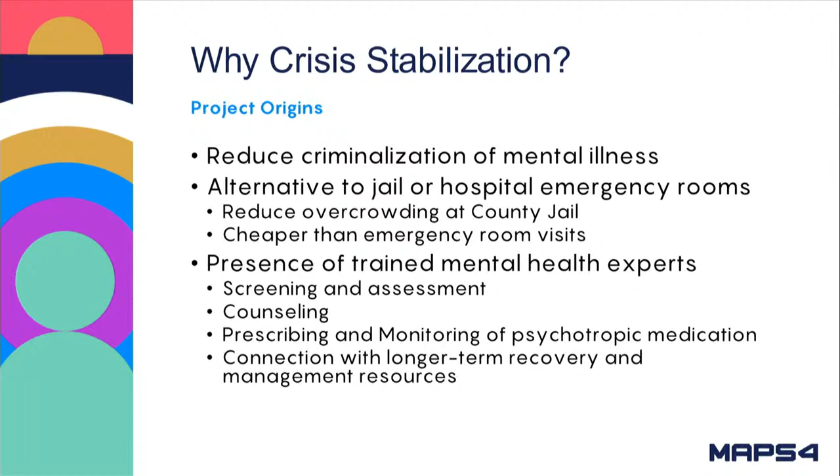So it's very easy to slip into talking about the two wings at OKIC. As a reminder, OKIC, at the General Pershing campus for North Care, is viewed as the model we were supposed to be following. It actually has two wings, so it's often easy to fall into: are we talking about the chair wing or the bed wing? I wanted to briefly introduce those two concepts.

Everyone enters the OKIC through the Urgent Recovery Center, the URC, which is the chairs. The folks that run that will be careful to say it's not 24 hours, it's 23 hours and 59 minutes that you're supposed to be there for, while you're being assessed. Generally, you're having medication introduced into your system. The staff at that point is really trying to triage and understand what that person is dealing with, because it's very difficult in those first 24 hours to understand all they may be coming with.

Then they will transfer to the crisis stabilization unit, which is a bed setting. At OKIC, there are separate rooms with beds, whereas the chairs are in a common room. That's anywhere from 3 to 5, sometimes up to 7 days typically, that you'll be in that crisis stabilization unit. I didn't mention to the subcommittee, but one of the other MAPS projects we'll eventually start talking to you about is the housing piece, which is really supposed to be the next step after this, where you can transition, hopefully, into some short-term housing.

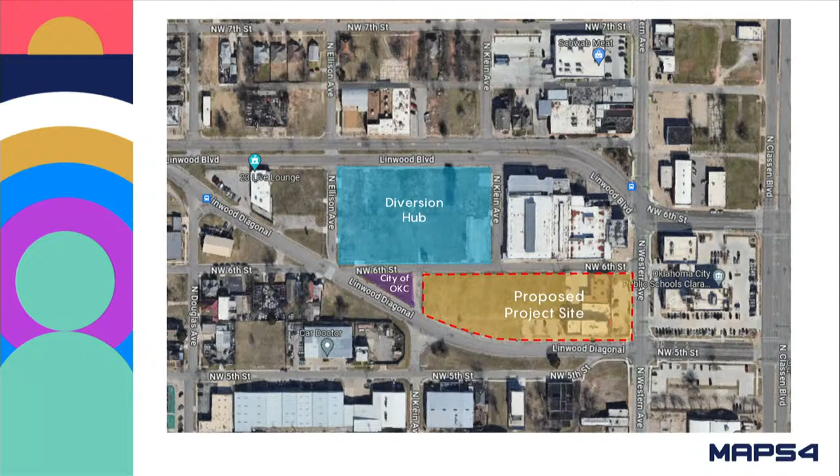You may be familiar with the Diversion Hub site, which is in blue. They have brought to us the potential to use the yellow site there, proposed project site, and then also there's a small purple triangle that the City of Oklahoma City owns, that could also potentially be brought into this site, which AHMM will talk to you about.

So in looking at your site selection, I would encourage you to look at this from 3 different perspectives: 1 is resident need, 2 is accessibility for first responders, and 3 is links to our existing healthcare system. I'm going to walk you through those as quick as I can here.

Often when you look at our city, you kind of think about our entire boundaries, but I wanted you to look at this because this is really housing density - this is how we actually use our community in terms of where our population is concentrated, and our proposed site would be right here.

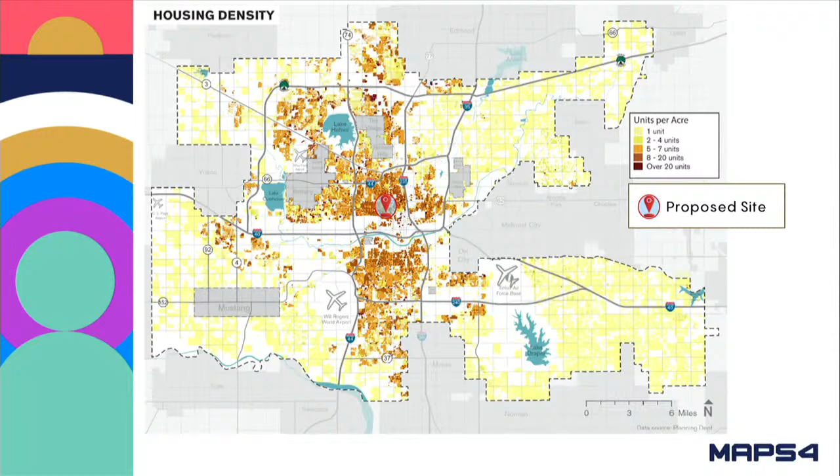Also, we were able to get with the Oklahoma City County Health Department, and they shared 3 key data points that add up into an index map, where you add all 3 together. I'm going to walk you through each of those 3 data points.

This is suicide rates by zip code. Suicide is a lower occurring phenomenon, so you're not going to have data in all the zip codes, but our site is right here.

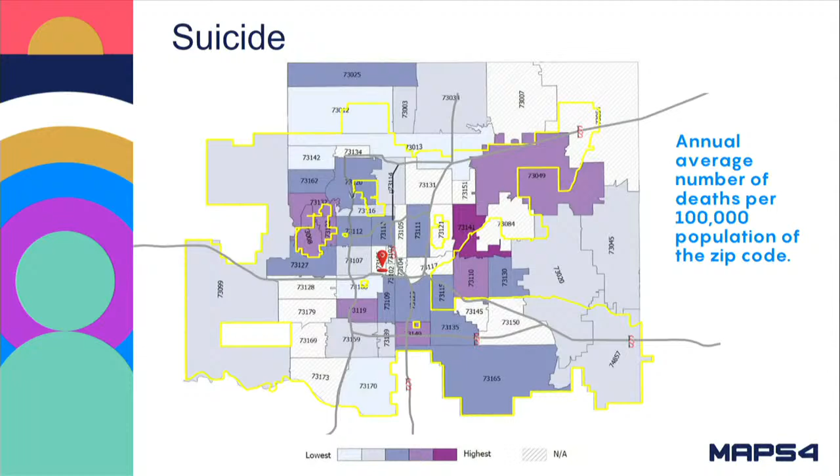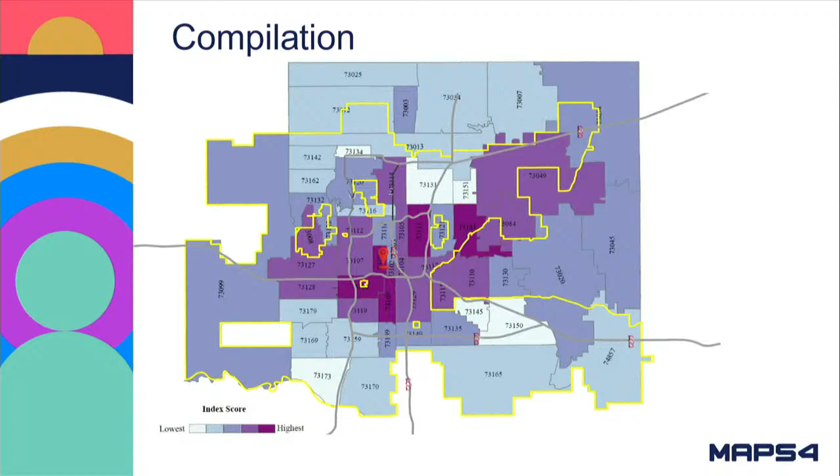Second point I want to talk about was first responders. We want to make this as convenient as possible to our first responders - they are very time crunched. That is very clear when you talk to them, and so we want something that's as convenient to all officers of our community.

I had a chance in November to do a ride-along with someone in Hefner 1 up in the northwest corner. The key takeaway from that and talking to that officer is there's only a certain number, maybe 12 officers, out on any particular beat in Hefner 1 across 3 different shifts. If they have somebody having a mental crisis, they're leaving Hefner 1 to take them somewhere, and that means there's one less officer up there.

They feel a very strong commitment to get back to their fellow officers in case they're needed, so we want to make that a very quick trip for them. The main takeaway is that we need to keep these things centralized, because you can play a game where I start to move that dot any direction and it becomes harder for those in the other corners to get to.

Last point is the healthcare system. You want to make sure there's a little bit of a back and forth. I was just debating this with Randy - it's actually more that they're coming to OKIC, and often OKIC is needing to refer them to a hospital, but in some cases, after they've been treated, they are coming back. So we want to keep them close to major health centers.

Good morning. Thank you very much for having me today to talk about this site study that we've done for the site that AJ's just introduced to you there. This is the site that we're talking about today, and we've done a few fit tests that I will talk to you in more detail about. Across here to the left of the page are all the different headings and analysis that we've completed, so what you're seeing today is a very small extract from a much larger document that looks at all these different points and topics.

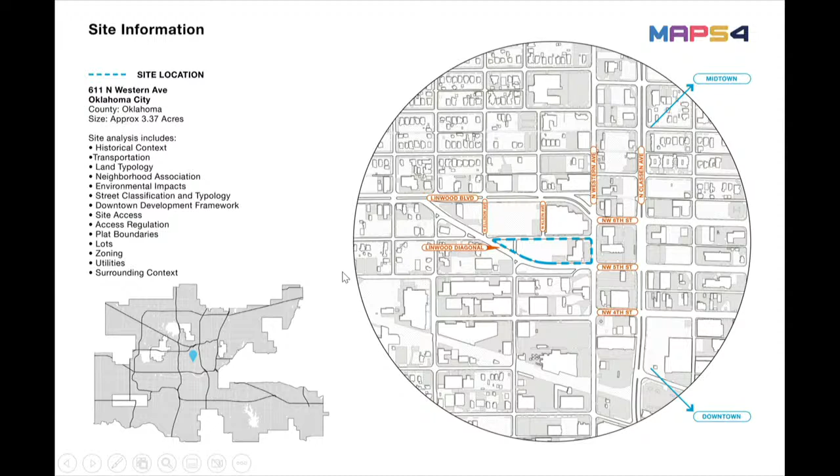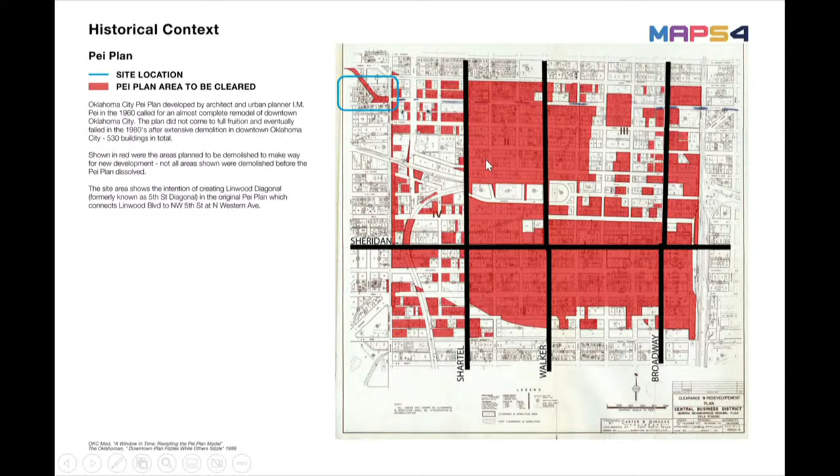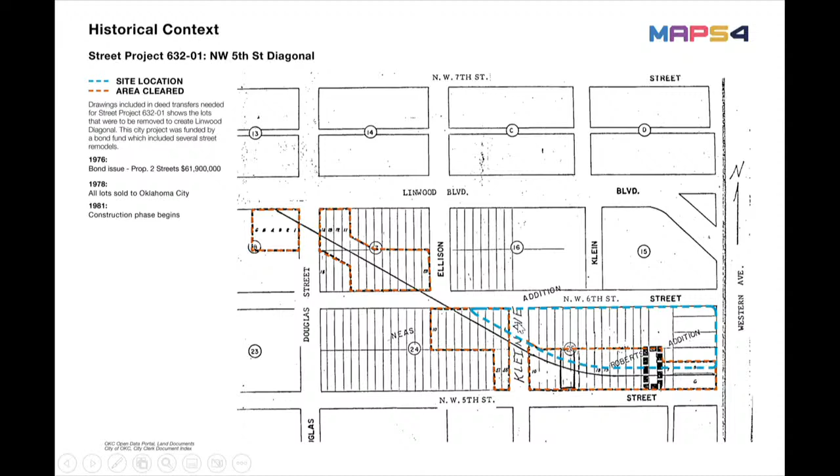The first thing we wanted to look at was the history of the site, and to try and understand why it was this slightly odd shape, this wedge shape. As you can see, it wasn't always like that - it was a typical sort of grid system, which the rest of the city follows. But over in the 1960s, with the IM Pei plan to demolish most of downtown for redevelopment, up in the top corner here shows the location of the site, and there was a key idea about connecting in 5th Street, and they created Linwood Diagonal. Obviously, most of the other demolition wasn't completed, but this section was, so that was the area that was demolished, and that's why the site forms this slightly different wedge-shaped plot of land that we're looking at today.

So we took the information that was provided to us by ADG, the initial programming information, and we worked with Northcare to refine that a little bit further, and we've come up with some areas for the 2 different buildings. The first is the Restoration Centre, which comes out to about 43,000 square foot. The second element is the transitional housing. We haven't been officially appointed to move forward with the transitional housing as yet, because there isn't an operator in place, but as part of this test fit study, we thought it was prudent to look at the transitional housing and make sure that could also fit on this site if it were to be co-located. That came out to be just over 18,000 square feet.

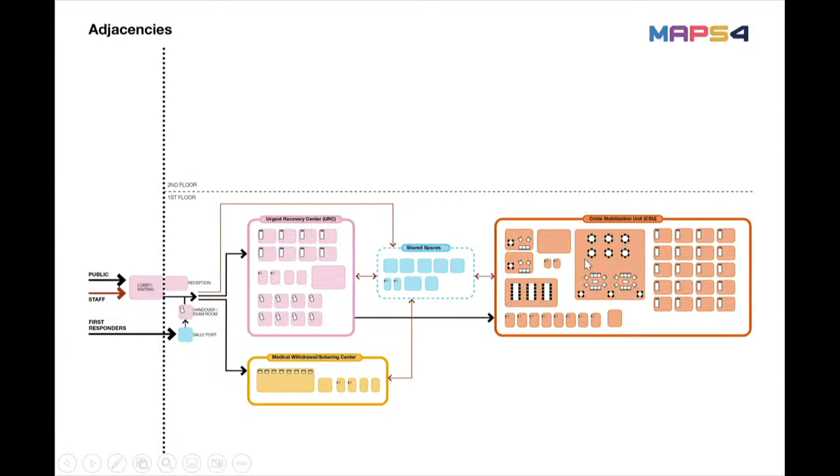You come through, and first responders have their own sally port secure entry. There's then a handover area, and once clients are assessed, they're taken to the URC, the chairs AJ was talking about, or into medical withdrawal. From the URC, where you're there for 24 hours, you move to the crisis stabilization unit, where you're there for a maximum of 7 days. These areas pinwheel around medical services, nurses' stations, and offices.

Another entry is required for maintenance, deliveries, back of house, and servicing, which comes into a separate area that needs to be completely separated from the other uses of the building.

Going up to the second floor, another key component of this building is the outpatient services. If you've been through the system and you're on your road to recovery, you come back to this building for ongoing treatment, counselling, and to meet with other partners within the city. Again, that needs a separate entry from people who are potentially in crisis—if you're in recovery, you don't want to mix with people who are having a really bad day.

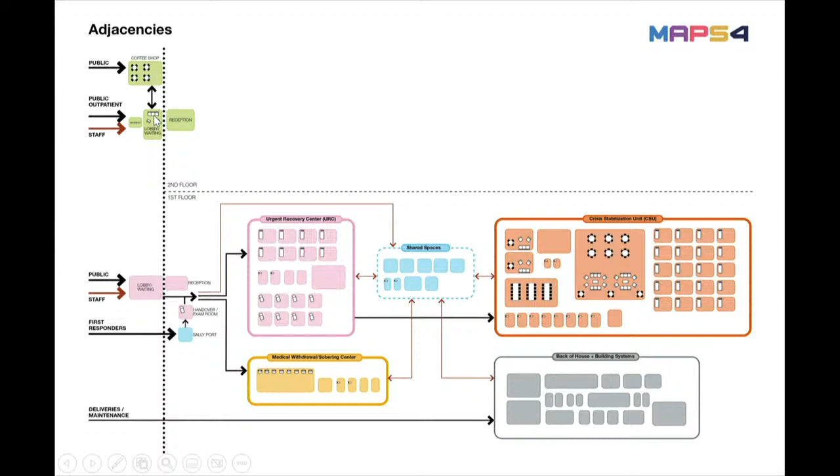So the idea is you come through. There's potentially a coffee shop that could be entered directly by the public, connected to this lobby area. Then you move upstairs to the outpatient services located here, and also some administration for partnering services within the city.

These red arrows represent us trying to connect staff circulation routes, making sure they don't interact with clients potentially moving through the building.

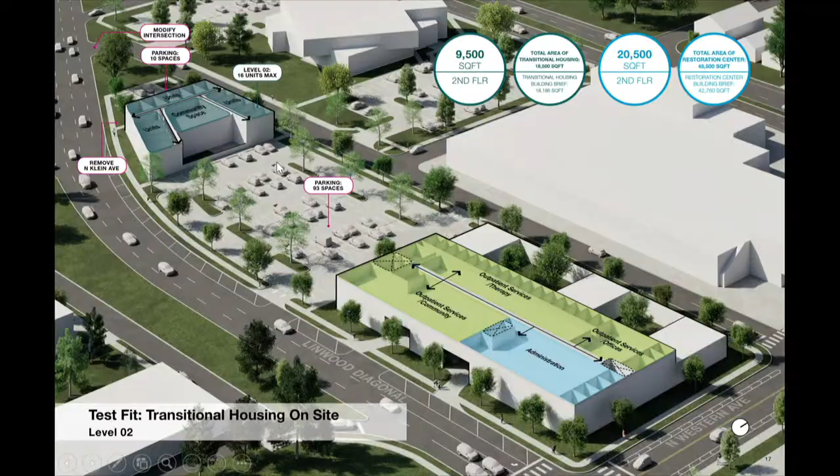And that was it. Okay, thank you great, very much.

One last thing I didn't touch on is this has been introduced to us as a potential donation to the project. Right now, we have $1.1 million for land acquisition. We had started to look at other sites before this was brought to our attention, but we felt like this was just such an amazing opportunity because it checked so many of the boxes, and we have the potential to save that 1.1 and put that back into our overall construction budget, which would raise it from about 17.4 to 18.5. That's why we wanted to go ahead and have HM do this work to exhaust this as a potential site before we looked at anything else.

Thank you, AJ. Any questions? Yes, Joy.

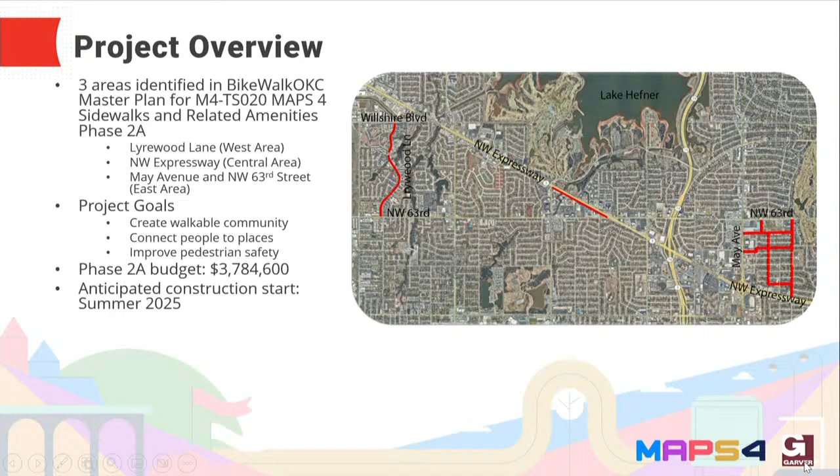Budget for this phase is a little more than $3.7 million, and we anticipate starting project construction in 2025.

The first area we'll look at is along Lyrewood Lane, bounded by Wilshire Boulevard and Northwest 63rd Street, east of Rockwell. This area is highlighted with a lot of multimodal, multifamily facilities, residential neighborhoods, but also Two Lakes Elementary School, along with 6 Embark bus routes and bus stops currently in this location that do not have sidewalks connecting them.

The next location is in the Northwest 63rd and May Avenue area. You see on the screen here, it's bounded by Northwest Expressway on the south and 63rd on the north, and the east half or east side of May Avenue.

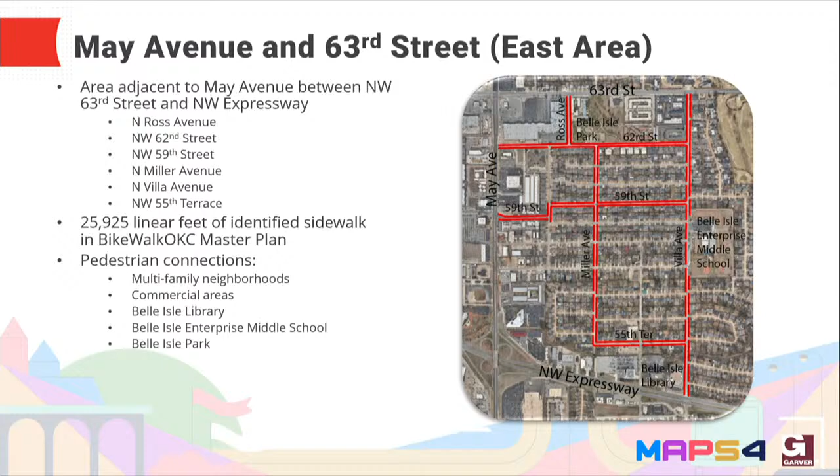Again, trying to connect people and places with residential areas. This is in the Belle Isle area, so you'll see Belle Isle Park, Belle Isle School, Middle School, and Belle Isle Library are in this general vicinity, but it also has a good connection to commercial areas along 63rd and May Avenue.

The last area is along Northwest Expressway, and the connection here is to an existing trail that crosses Northwest Expressway at a signalized location for protection of pedestrians to the bus rapid transit area located on the northeast corner of Meridian and Northwest Expressway.

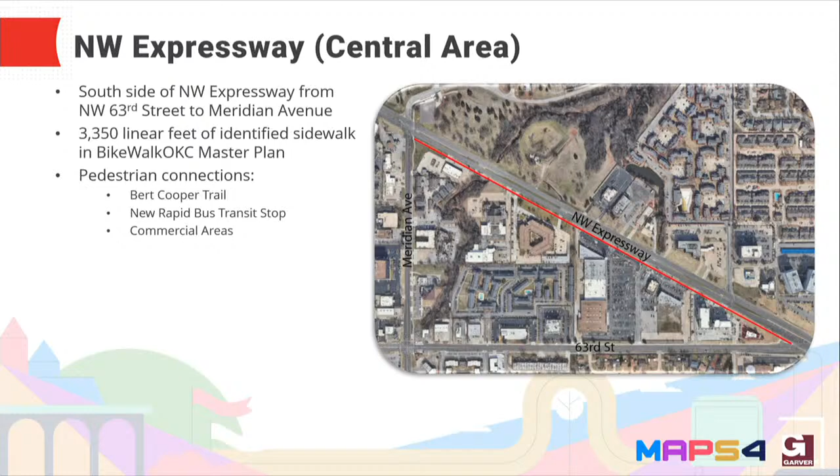So with that, some more in-depth, I will let Daniel Jordan speak here.

Thank you, Brett. So this is just a real high-level view of some of the design challenges that we saw when we were doing our field reconnaissance and getting the general feel for the area.

Starting off, this is on Lyrewood Lane, approximately halfway between Wilshire and 63rd. This is a drainage structure that goes underneath the road. It's an at-grade structure, and you can see there's exposed rebar in this photo on that structure, so it's non-compliant from a surface standpoint for accessibility. Also, it drops down from the road surface area in general, so there's just no connectivity and ADA compliance.

John's going to touch a little bit more about how we're going to address this one, but this was one of the more challenging aspects along Lyrewood Lane that we saw.

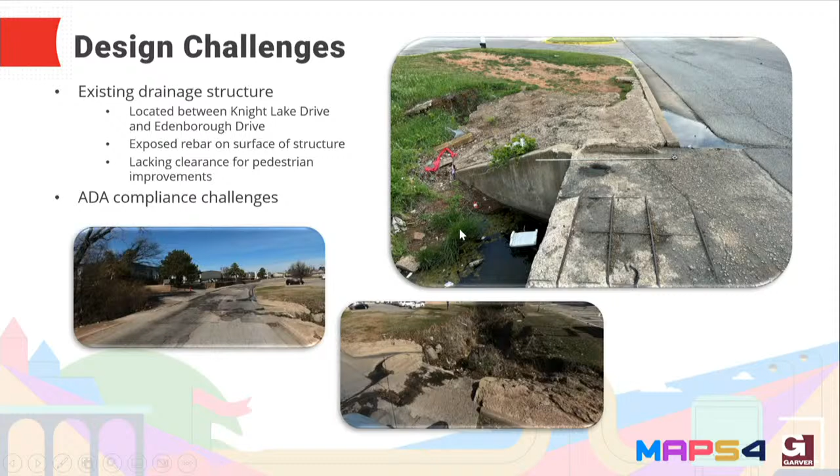Moving over into the Villa and 62nd Street area, we have quite a bit of a grade impact with that senior living condo-style housing there, and their private staircases that connect down to their on-street parking, as well as several utility relocations. So just topography and utilities that we're going to see have an impact on our timeline moving through that section, and also the cost of the retaining wall.

And then some additional connection points along 62nd going into May, just with grade, and also where we're putting people at the end of that corridor. And then moving over into Northwest Expressway, a couple of drainage areas.

This top right one is located near the First Church of the Nazarene. Thankfully on this one we don't foresee the need for a box extension. However, it is quite a drop down on the other side of that, so for safety reasons we'll want to probably look at the addition of handrails and things like that.

As well as down here on this other extension, which is a little bit further to the southeast, near the Academy and Northwest Office Center, we just have a confluence of different drainage paths there. So we have a combination of utilities, drainage, and then width between the roadway that are just going to create some challenges as far as grading and getting our sidewalks through there.

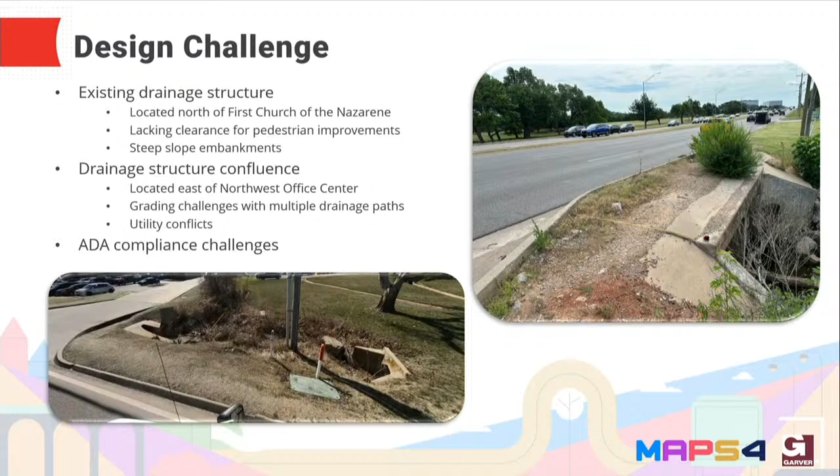And with those kind of highlighted, I'll turn it over to John to go over our project recommendations here.

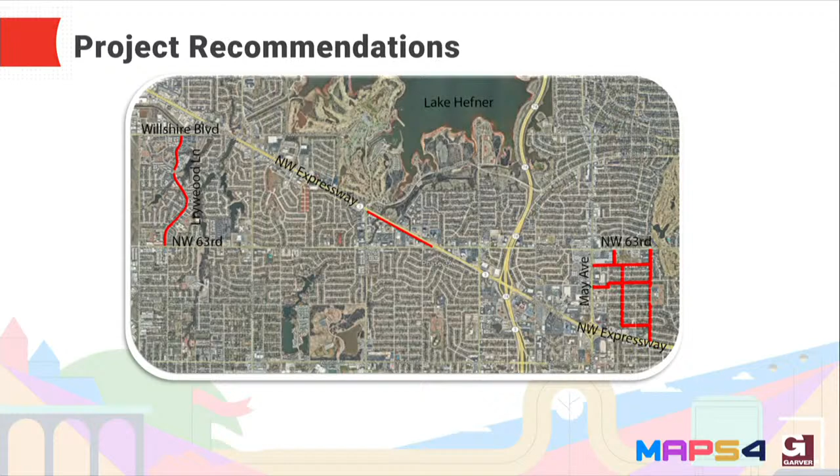Thanks, Daniel. So now that we've highlighted the 3 project areas and identified the Bike Walk OKC plan, we're going to walk you through some of our project recommendations.

Starting with May Avenue and Northwest 63rd Street, which is what we're calling the east area, the Bike Walk OKC plan identified 6 different residential streets, as you'll see in the map on the right, to provide connectivity to and from May Avenue, Northwest 63rd Street, and Northwest Expressway. As you can see in the map with the red lines, we are proposing a sidewalk along one side of each of those streets.

This is primarily neighborhoods, so these are typical residential streets. Because of that, we're proposing a 5-foot wide sidewalk at the back of curb, as you'll see in the typical section below. Specific to this area, we've added an additional stretch of sidewalk along Rouse Avenue in that top left corner, from 62nd Street to 59th Street, which is about 3 blocks.

The reason for this is the intersection of May Avenue and 62nd doesn't have any existing access for pedestrians to cross May Avenue. However, 59th Street is an existing signal with ADA compliant curb ramps, crosswalks, push buttons, things like that. So we wanted to provide more of a direct connection from 62nd to 59th.

Looking at the next area, it's Northwest Expressway, which is what we're calling the central area. The Bike Walk OKC plan identified sidewalk along the south side of Northwest Expressway from Meridian Avenue to 63rd Street, and as you'll see in red here as well, we are proposing sidewalk along those entire extents.

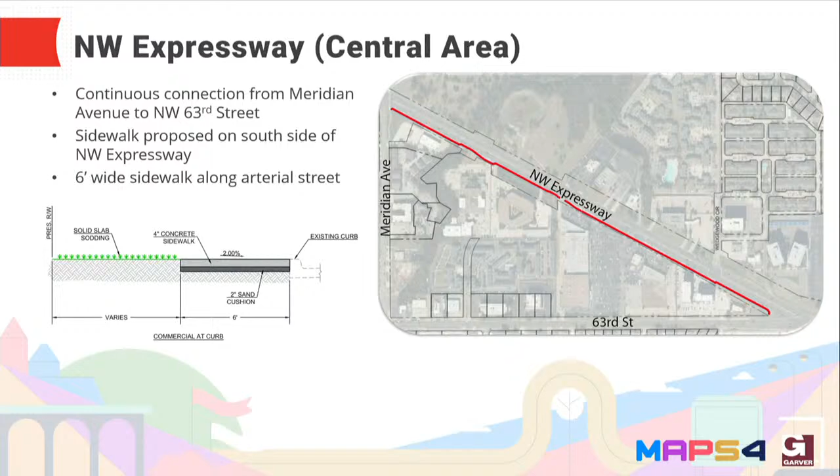Looking to the last area, Lyrewood Lane, the west area, the Bike Walk plan identified sidewalk on the east side from Wilshire to 63rd Street, and we are meeting the intent here as well, as you see in the red. This is kind of a mixed use of residential and commercial, with some residential complexes but also commercial properties.

So we're treating this as more commercial, also because there's an Embark bus stop route along Lyrewood Lane. As Brett mentioned, there are 6 existing bus stops on the east side alone within these extents. So we wanted to treat this as commercial, proposing a 6-foot wide sidewalk at the back of curb, as you'll see in the typical section below.

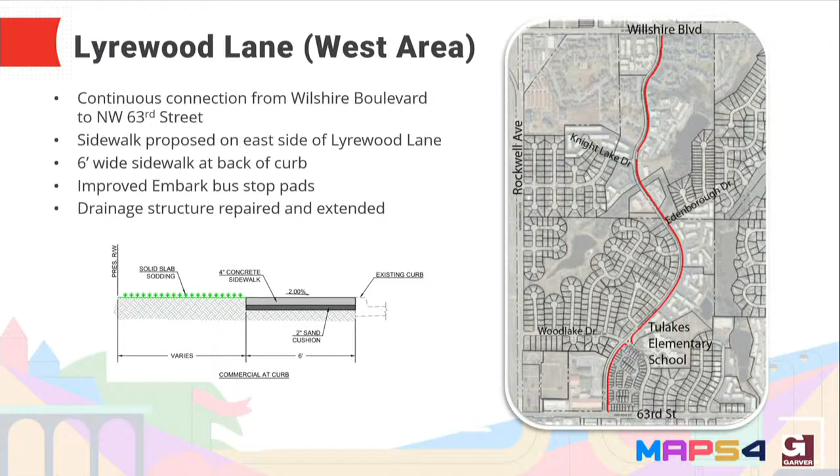One of the major design challenges, as Daniel mentioned, is that existing drainage structure under the road. It's got exposed rebar on the top of the surface, which makes the walking surface not ADA compliant. It's also not wide enough to fit a 6-foot wide pedestrian path across the top of the box.

So we've provided a little illustration here to show how we would improve that box and accommodate that 6-foot wide sidewalk. Essentially, we would remove the deteriorated section of the box and extend it out with new concrete and steel, wide enough to fit that 6-foot wide sidewalk across, also fixing the ADA surface issues.

Now to talk about construction costs. As you can see here, we provided a cost for each of the 3 areas and then a summation of those. The estimated construction total for Phase 2A is approximately $3.58 million, and the Phase 2A construction budget is $3.78 million. So that puts our project recommendations under the budget by about $200,000.

With that, I'll turn it back over to Brett.

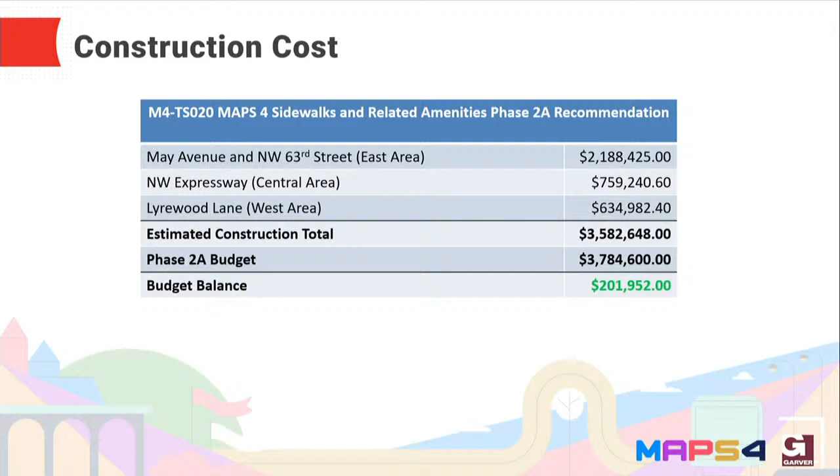That'd be early in next year, and then completion with the construction plans towards the end of January. Then we would submit for approval to bid and advertise in March, and hopefully have a final presentation to you all in April of next year.

Construction is set to start sometime in the summer. Being a very visual person, this is where I like to see things done - it's a little easier for me. We do have a pretty long construction duration period.

That was probably a little bit conservative, particularly whenever we go through neighborhoods. It takes a little bit longer coordinating with residents when we have to tear out driveways and replace them, coordinating with their schedule. So we added a little more time for some of those residential areas. Northwest Expressway has very high volume, high speed traffic, so that may take a little longer as well, so construction crews can do their work safely.

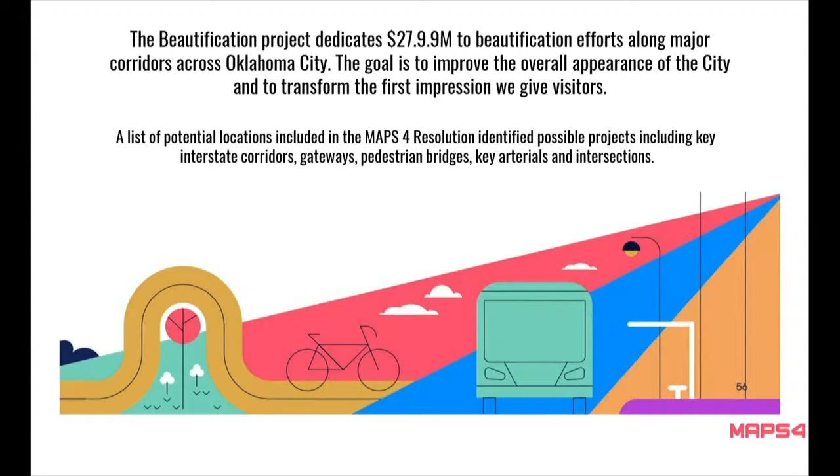The project identifies $27.9 million for beautification efforts in major corridors in Oklahoma City. There's another $5 million for beautification in the operation fund for planning to manage, and others to manage the actual implementation and ongoing maintenance of the beautification projects.

The City Council MAPS 4 resolution identified multiple project potential locations that we have integrated into the plan. So this is the list from the original resolution.

After kickoff, we had a lengthy engagement and focus group study process where we met with stakeholders and the public to get their input on beautification ideas, approaches, and what they wanted to see. The stakeholders were incredibly important because many of them will be leaned on for actual maintenance and management of the beautification assets once they're all designed, planted, installed, painted - whatever element is chosen for each spot.

One of the biggest things we wanted to focus on, though, was bang for your buck - spreading the wealth for all the projects, because it's a lot of locations and a little bit goes a long way in some of these spots.

We created what was called a vision strategy after the public engagement, and we wanted each project evaluated through the lens of creating people-centered places and beautifying connections between those places. With that, we came up with 5 different beautification principles applied to each project. Some projects hit all 5, some only hit a few, but we tried to get as much as we could at each location. The first principle is people, the second is promotion, the third is purpose, the fourth is a sustainable project, and the fifth is connection.

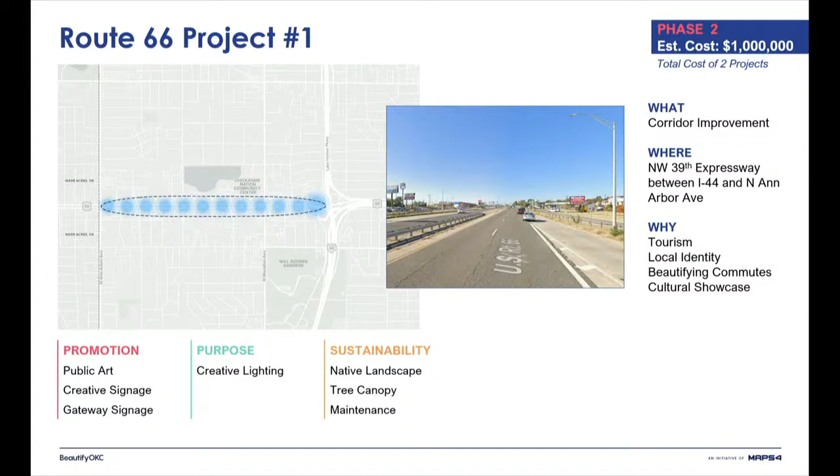So we have 2 segments here. This is really one project, but really 2 separate projects, though within that table we've tried to group things together based on what would be achievable in terms of implementation.

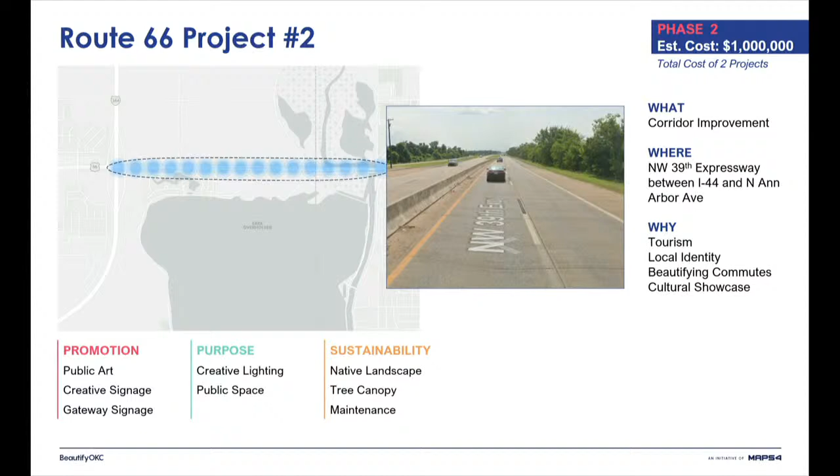So here, really, those 2 segments over by Lake Overholser -- we have a great landmark in the Lake Overholser Bridge. We assume that's going to be a popular destination for those traveling during the centennial time. So we'd like to see this enhanced with creative signage, lighting, and really look at opportunities for visitors, as well as a creative gateway into the city.

Also in that first phase of design within phase 2, we have the Bessie Coleman and airport approaches. For that first airport approach, we're recommending the addition of the Bessie Coleman Garden next to the 99s Museum of Women Pilots. We have about $1.5 million to spread across these 3 projects: 3 airport approaches, and the first approach would include that Bessie Coleman Garden.

A lot of what you'll see at the bottom of these projects are those elements we discussed last time: trees, public art, creative signage -- each attributed to the 5 vision principles we're operating on. Then we have the I-44 airport approach, and the State Highway 152 airport approach as well. So $1.5 million to scatter throughout these 3 projects, but we don't want to limit what that looks like in this first phase. We've created a recipe of those elements, and moving forward, we'll work with the designers and evaluate them based on their ability to achieve those principles.

And we've developed a matrix to really help the MAPS program and ourselves manage expectations on meeting those.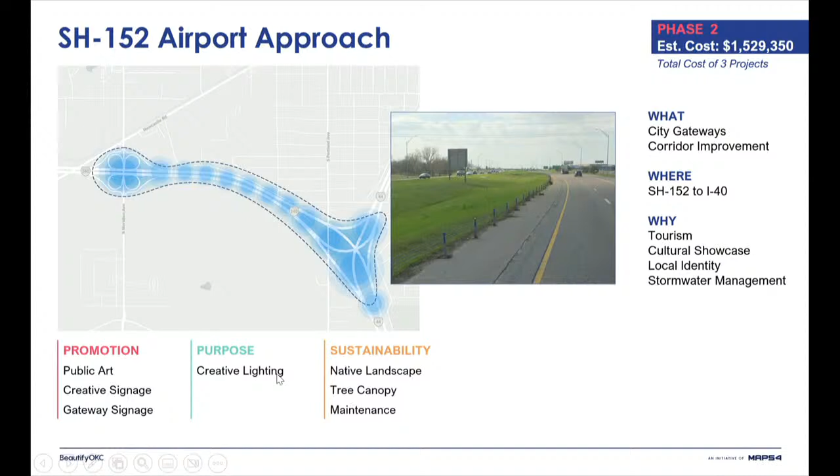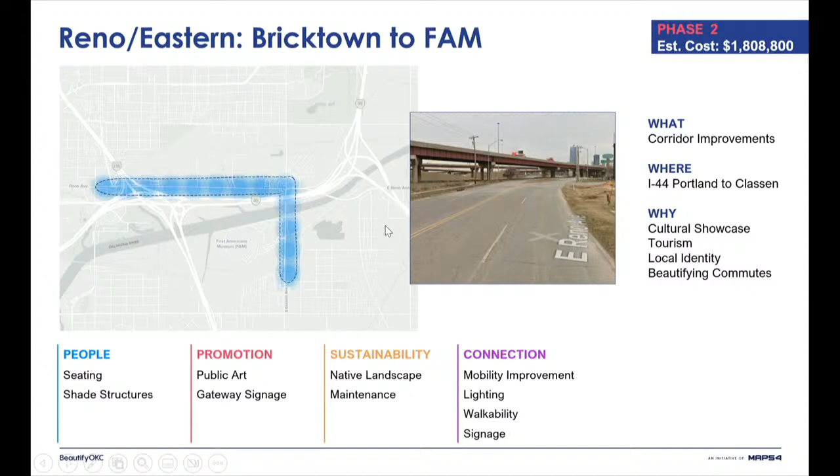Another really exciting one, for the Olympics, is a great connection between the First Americans Museum as well as Bricktown, looking at improvements to increase pedestrian mobility between those two destinations. Currently it's an uncomfortable travel, and parking will be at a premium during these events, but we also want to provide an enhanced pedestrian experience for residents in this area, connecting those two landmarks.

Moving into phase 3, we have 3 pedestrian bridges. This is considered one project, but with 3 separate projects under it. We have $2 million spread across these 3 pedestrian bridges, looking at enhancements on the inside of those bridges and on the outside. We'll be limited on what is structurally possible, but we've had a lot of conversations with ODOT to make sure we enhance the visual appeal while keeping it feasible and safe for users.

So we have pedestrian bridge number 1 here. This is the first one, right over here by Rockwood Elementary School.

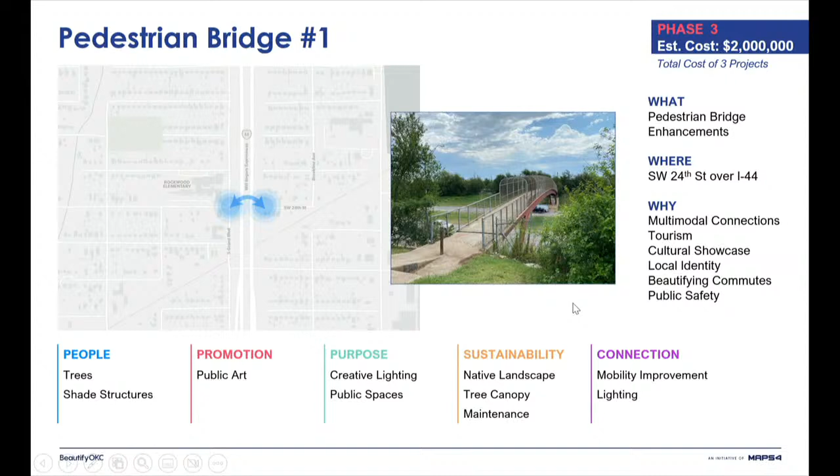And then pedestrian bridge number 2. I'm sure a lot of us have passed under these and probably wished they looked a little more appealing. But I want to emphasize that they get used, and I think they're currently a harsh environment for users. Softening these elements will be beneficial for pedestrians as well as the motorists who pass through them, also acting as a gateway and enhancing that first impression for visitors.

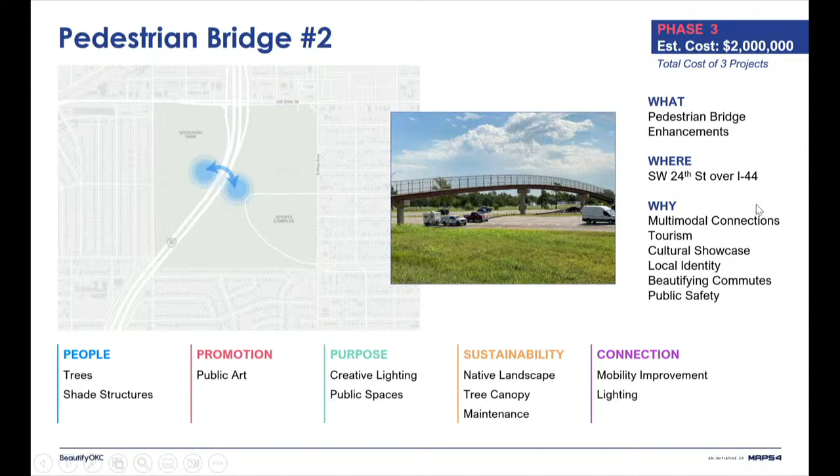Then we have the Northeast 23rd Street and Ralph Ellison statue, looking at this entire intersection. There were some funds in this first phase put toward acquisition of the land here. But in working with residents, there was a desire for more of a plaza, something that enhances the statue itself. We wanted to create a gathering space with seating and plantings, not just a statue, but a space where people can gather. We also built in flexibility for where the exact location might end up, because there's a redevelopment plan for the corner there. It's possible this could end up closer to the library, so we've pushed this into a later phase, buying ourselves time for those details to be worked out before entering the design phase.

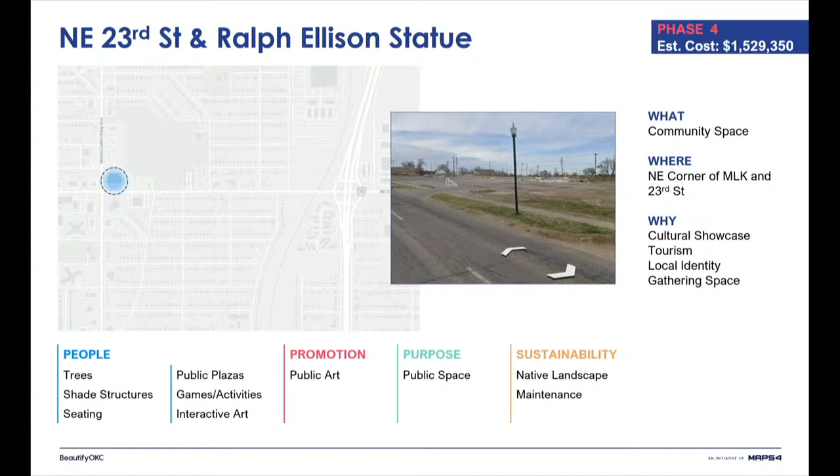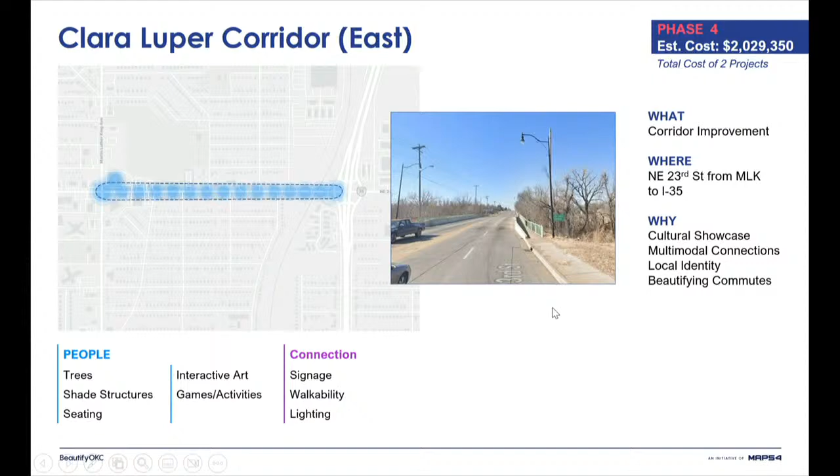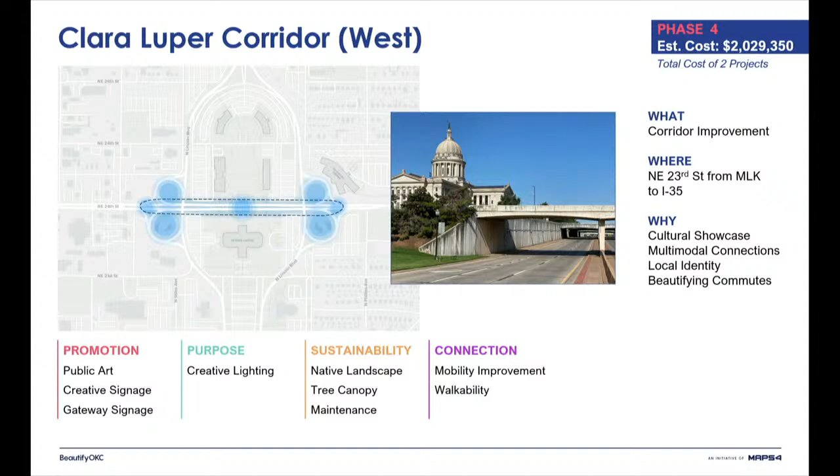And then we have the Clara Luper Corridor, with two different segments. One project, a little over $2 million, but two different opportunities to enhance the gateways. There are some monuments there currently and some beautification surrounding them, but we want to draw more attention to this unique asset and fixture within the community. This is also connected to the state capitol, so we think it's a great opportunity to enhance the safety and connectivity of this corridor, and also enhance what we're showing people visiting the capitol.

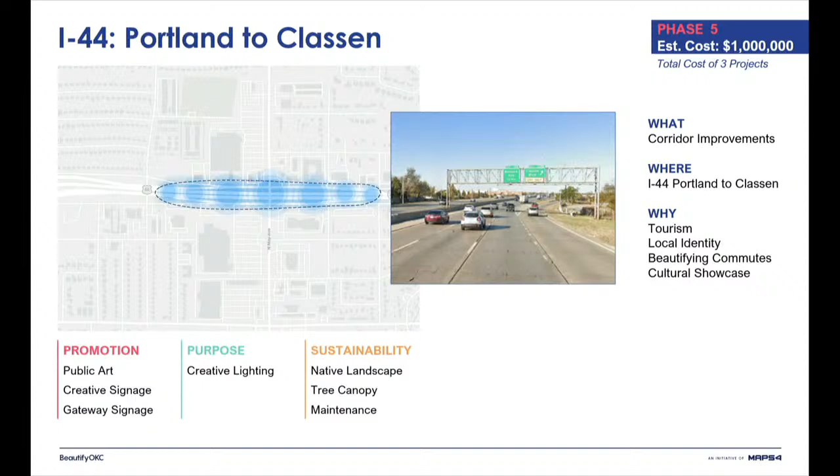The two different sub-projects are at the underpasses at Youngs Boulevard and Pennsylvania Avenue, again trying to increase the safety here, soften the area by adding some lighting, and really make people feel safer when they're passing through these.

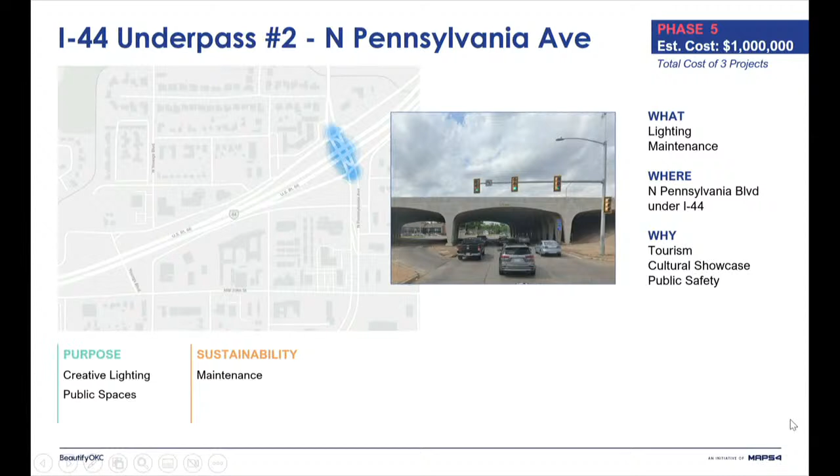And then we have the Oklahoma City University 23rd Street corridor. There's some beautification right in front of the university, but there's also bus stops that don't have a lot of separation from oncoming traffic. We want to look at how to enhance the feeling of safety for our transit users, but also create a gateway and welcoming atmosphere for this university corridor.

And then we have Interstate 240, I-44 to I-35. We have a lot of median area here and a lot of opportunity to do some low-cost plantings. I should note that we've recommended trees in pretty much every single project throughout, and it's contingent on identifying the source of maintenance moving forward, but that's something we plan to work out with our designers in that phase of design.

We've also added in the appendix some alternative planting areas. So when you get into the appendix of the plan, you'll see that we've suggested planting areas based on ACOG's environmental risk map, based on where there's not current tree coverage.

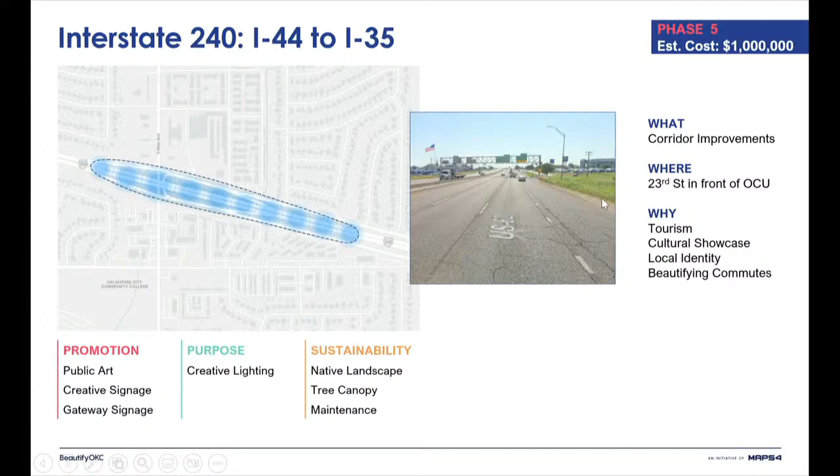Yes, can we go back to those 3 bridges? I know we mentioned we'll be working on additions to beautify them, not really touching the structure. Can you allude to what it would cost to build a whole new bridge? Because these are kind of terrifying. Even with the fencing all around them, even though we add art, it's still kind of scary to go through.

I am not qualified to make an estimate on that. I don't think he legally can, but for a span that large, I can tell you it'd be several million dollars. So we're just doing the best we can with the budget that we have, right? Right, this is beautification, not reconstruction, not replacement kind of things.

Okay, that makes sense. We do think a lot of it will also look at the entry points there, softening it and trying to make it more welcoming, working within the confines of not being able to rebuild a better bridge. Just the fencing around it is very intimidating. Yeah, I think you'd agree that even just a new paint color, something exciting, maybe some lights or decorative lighting could be really helpful. There's obviously, the coverage is intentional, and I think there's a desire to keep that just from possible projectiles that could go either from the bridge or from the street, just trying to protect people. But there's obviously a lot of different ways to increase the visual appeal of a protective cover, and I think that's what we're really aiming to do as well.

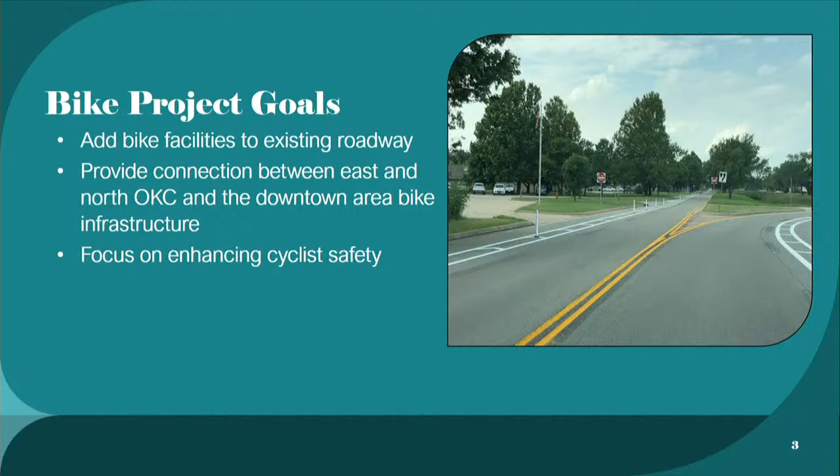The overall project goals were to add bike facilities to the existing roadway, provide connections between the north and east portions of Oklahoma City to the bike infrastructure already installed around downtown, and really just focus on enhancing cyclist safety.

Highlights for the Classen Boulevard project: we added 5-foot bike lanes with 5-foot buffers. This is a Tier 1 facility, so it's a protected facility. We added almost 1,200 delineators that'll run along the buffer throughout the entire limits. We did have some repairs to damaged pavement to take into consideration, wanting to make sure the limits of the bike lane footprint have good pavement so the stripe goes down on a good surface. We also updated the signal detection at Chesapeake Drive.

We did have some adjustments to make from the original bikewalkokc plan. The plan on Classen was to carry it all the way through the roundabout, but we can't put a bike lane in a roundabout, so we had to take that out. We stop it about 100 feet on either side. This was for northbound only, as southbound has 2 lanes that come through the roundabout. In the bottom picture, you can see the northbound and southbound bike lanes will terminate at Wilshire. We can't put just a short bike lane on Wilshire by itself, so we had to terminate that. We will have plenty of signs out though, showing where the route goes, so everybody knows to turn right and left for the route to continue, whether going northbound or southbound.

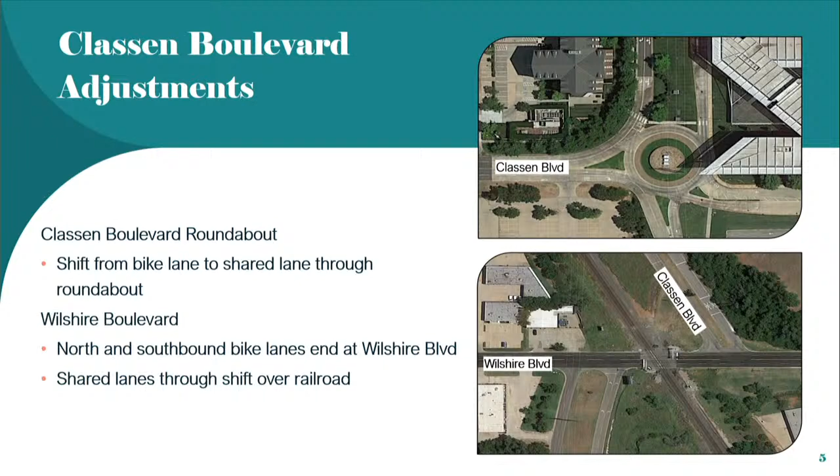Moving to 16th Street, the highlights here were that we updated pavement markings and signs. There are already some older style markings on the pavement now, so we're going to replace those and update all the signs. We'll actually do this on both projects, making sure all the signage is updated on Classen as well.

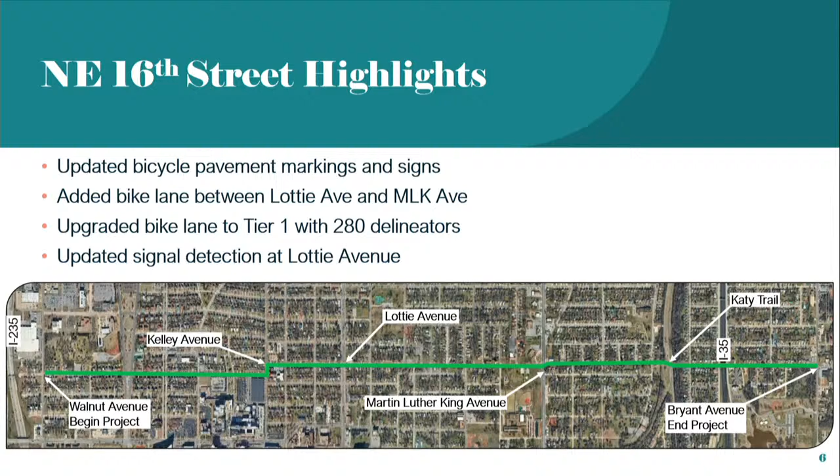We added a bike lane between Lottie Avenue and Martin Luther King. That was upgraded from a Tier 2, as shown in Bike Walk, to a Tier 1. We were able to add almost 300 delineators along with that project, and we updated the signal detection at Lottie Avenue.

Some adjustments we had to make: the original Bike Walk plan, shown in that top picture with the pink cloud, had limits that were supposed to be a Tier 2, but we were unable to do that because the roadway is too narrow. So we ended up revising that down to a Tier 3 and making it a shared lane.

But once you get to Lottie, that's where we added the Tier 1 facility, which extends over to Martin Luther King. We extended the overall project from Katy Trail out to Bryant Avenue, adding about a half mile of additional shared lane. There's a shared lane right now that runs along Bryant, so it ties into that. And in that bottom picture, at the Lindsay Avenue center median, we are going to add 8-foot sidewalks that'll go through there, pedestrian and cyclist accessible.

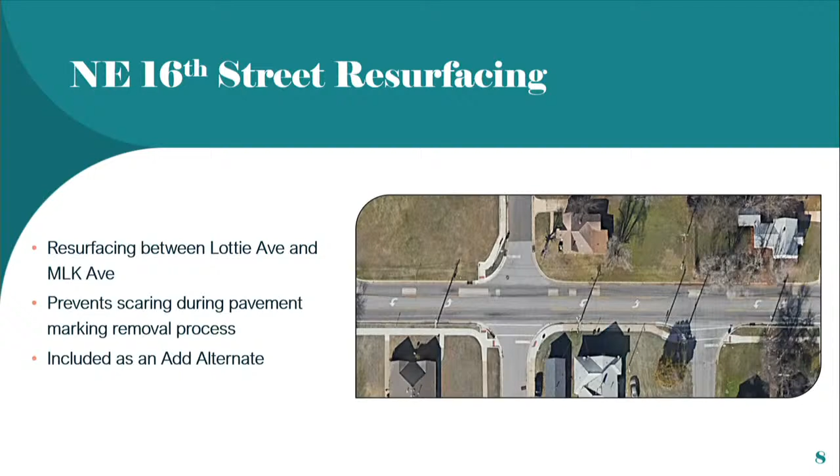We also added an add alternate to the plans for resurfacing Northeast 16th between Lottie and Martin Luther King. If we were to go in and remove all the striping from the center turn lane, the arrows, and all that yellow stripe, it would leave significant scarring on the pavement, and we'd end up coming back to restripe it. It gets a little dangerous at night when it's raining because you can't tell what's stripe and what's scar. So to eliminate that, we'd like to get good bids on this add alternate to resurface within those limits.

As for the project schedule, yesterday we got approval from the subcommittee. We'll hopefully get your approval today, then the council on Tuesday. Right after that, we'll jump into bidding the project with an award sometime in October, beginning construction and looking to complete it in spring of next year.

As far as budget and construction costs, there was $3.5 million in the budget. The Classen Boulevard project was about $1.5 million. The Northeast 16th Street base bid was at $564,000, and the add alternate is assumed to be around $550,000. But the base bid and add alternate together don't add up mathematically because there are a few duplicate pay items. So if the add alternate is selected, we remove those quantities from the base bid, and what's in the add alternate is what actually goes in.

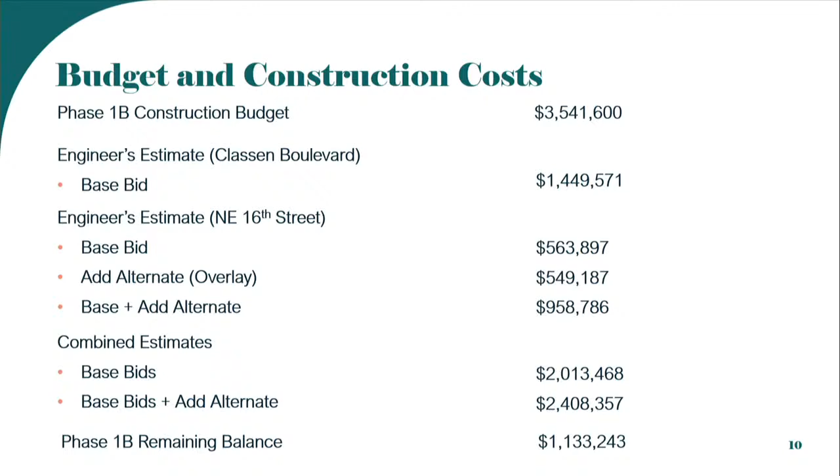It's just a difference in striping material. The combined estimate for the base bids was $2 million, and the base bid plus the add alternate is $2.4 million. We did have a surplus of $1.1 million left over in the budget.

The public information website has been successful. As of yesterday, we had 500 hits on the site with almost 200 downloads of the fact sheets. These are the fact sheets that are on there, and we've been updating it along with the change in schedule.

I'd love to answer any questions. Questions?

Can you talk to us a little bit about the surplus budget piece and how that will go into another phase? How will that be utilized?

Yeah, we'll just roll that over into other projects, other bike lane projects. It'll stay within the same genre, same bucket, just a different phase.

Okay, any questions? Okay, thank you so much, thank you.

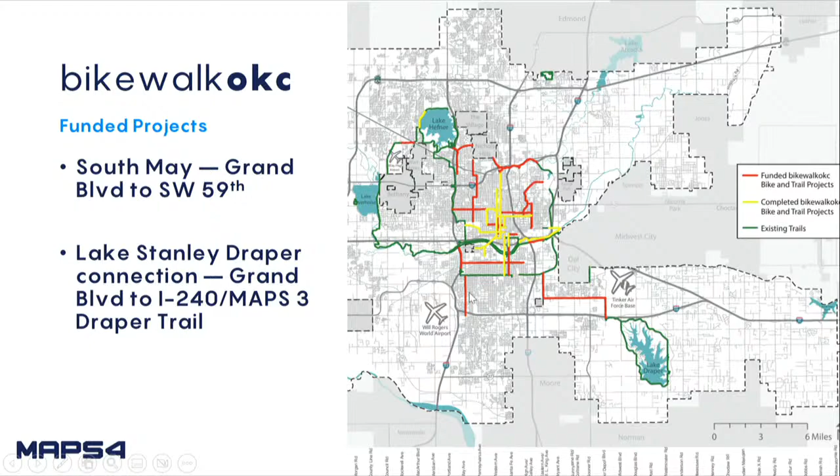Another item that has occurred since the resolution is that bikewalkokc was updated. Those are recent updates from earlier this year, and really looked at reworking priorities. Some have moved up, some have fallen down, but this is a prioritized list of proposed trail facilities throughout the city. That was taken into account as we looked at this.

This is specific, this is that connection to Lake Draper. What the city did was, between planning, public works, and maps, they coordinated and partnered together to create this connection. And it was done in 3 segments.

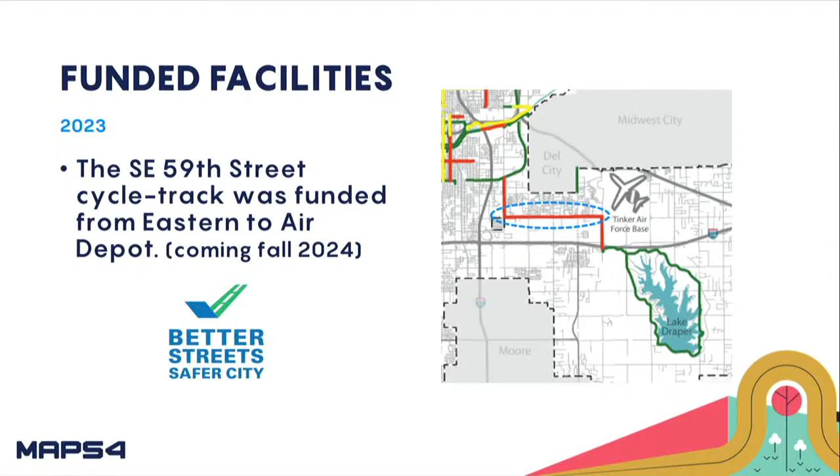So the Eastern Trail from Southeast 59th to Grand Boulevard was funded by ACOG and some TAP funds, along with some additional ARPA funds. Then through the Better Streets, Safer City initiative, the east-west section was funded. And then lastly, the last section to connect to Draper was funded through MAPS 3 funds. So between all of those entities, that project is in design right now and under construction and will be finished soon.

So going back to their priorities, what we tried to focus on when looking at what made sense for the next connection was those top 5, 6, 7 priorities. You see priority 1 there is Legacy Trail. I'm not sure if you're familiar with it, but that's near Booker T. Washington Park. It's through the BNSF Railway Corridor and then comes down into Bricktown. Planning and public works are already discussing that, looking at funding issues, so that planning is already in the works, as is the Brock and Twin Creek trails.

It kind of starts near Wheeler and proceeds south along Lightning Creek. There's a lot of private development along that, but that is also in talks for funding and being planned and coordinated.

So the South May Avenue Trail, which you see there as item number 3, really hadn't been looked at, hadn't been discussed, or funding identified for that. So that's where we really started to look at for an extension.

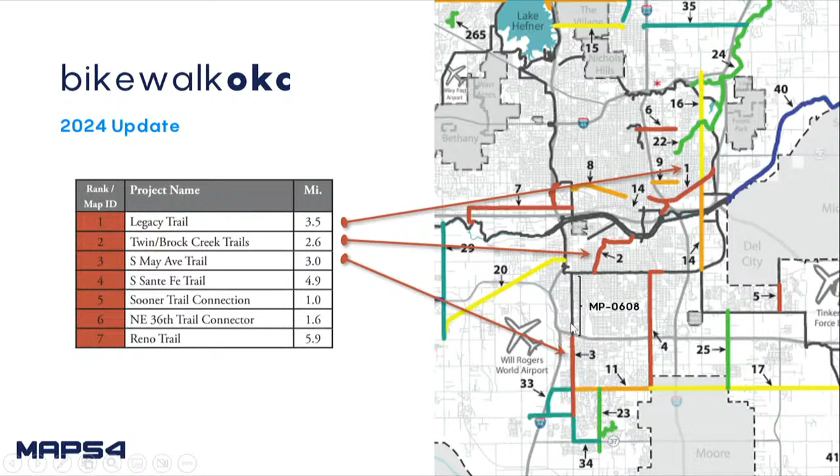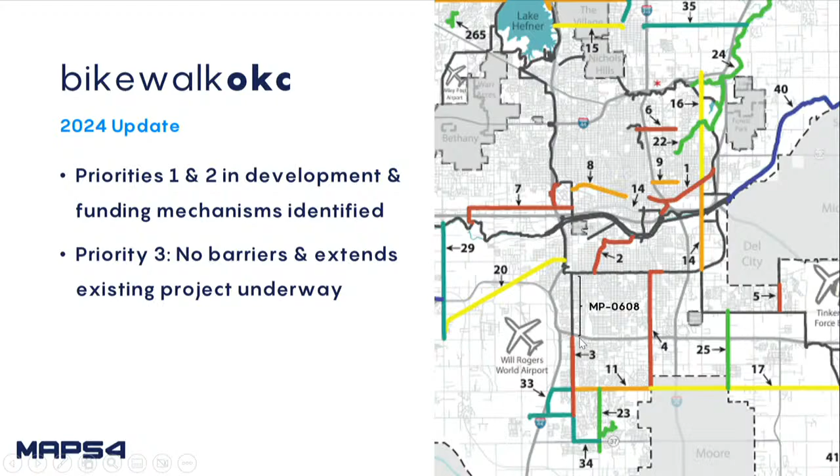We thought there was a lot of value for the community to possibly extend that. So again, priority 1 and 2 are already being planned and coordinated, so that priority 3 is optimum for more research and discussion.

So this is where we get into some detail on that existing project that's in design. It is funded for $3 million. The benefits of this are that it provides through the trails connection at Woodson Park and along I-44 up to the river, providing a connection to the Oklahoma River.

It also, with the new library that was constructed, the Almonte Library at Southwest 59th, provides great access to that. You've got OCCC down there at Southwest 74th Street that it can provide access to. And there's also 6 elementary schools on either side of the corridor that are within a mile. So this is really an important corridor, and to be able to extend that to the south would be great for the community.

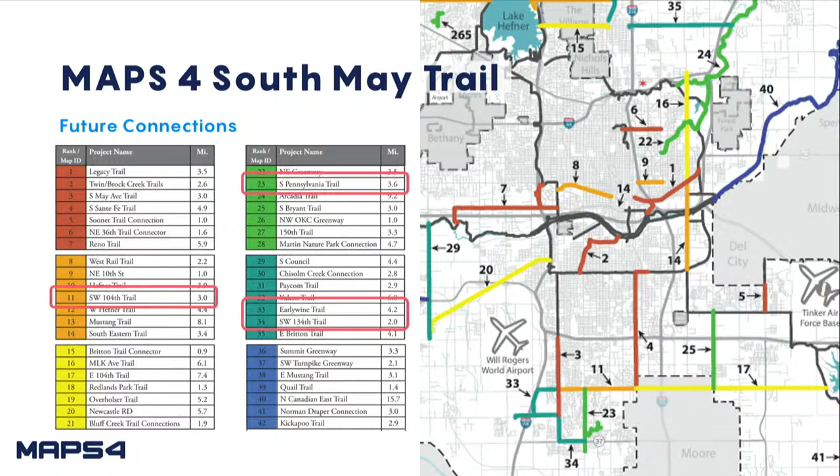But we won't know until later this year when that project bids. One of the last slides shows additional benefits, going back to that overall bikewalkokc plan of potential future connections in South Oklahoma City. You see roughly 4 other additional trails planned in that area that would connect into this portion we were just discussing. So what's before you today is a request to send forth approval of the resolution directing $8,172,123 to City Council for the trails budget to extend the South May Avenue Trail. Happy to answer any questions.

Any questions for Nate? I love connecting all the trails that we've got. So we need a motion and a second to approve this. Thank you. Please cast your votes. The motion passes. Thank you.

Moving on to item 2M, recommend approval of change order number 12 for the MAPS 4 Fairgrounds Coliseum, an increase of $89,938. This one does not have a presentation. This is a change order, routine items at the Coliseum. I can tell you that the Coliseum is going great, but things come up, and then also some things are requested by the operator, and you have several of those on here.

Access control additions for 5 doors. There's a ceiling change, so we have a credit on paint. Overhead data conduit was configured in a vertical manner, and once the operators saw that and knew how much clearance they needed to get equipment through this corridor, it needed to be changed. I won't go through each of these, but you can see there's additional power needed for an espresso machine and 2 ice cream machines. So it's just things like that come up.

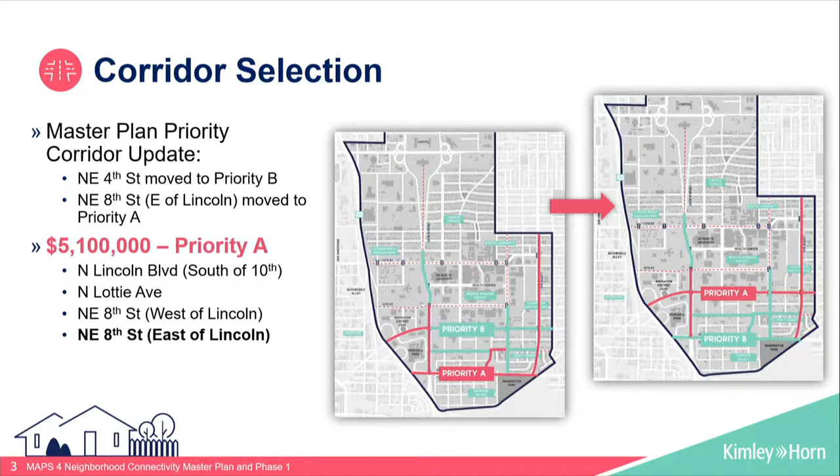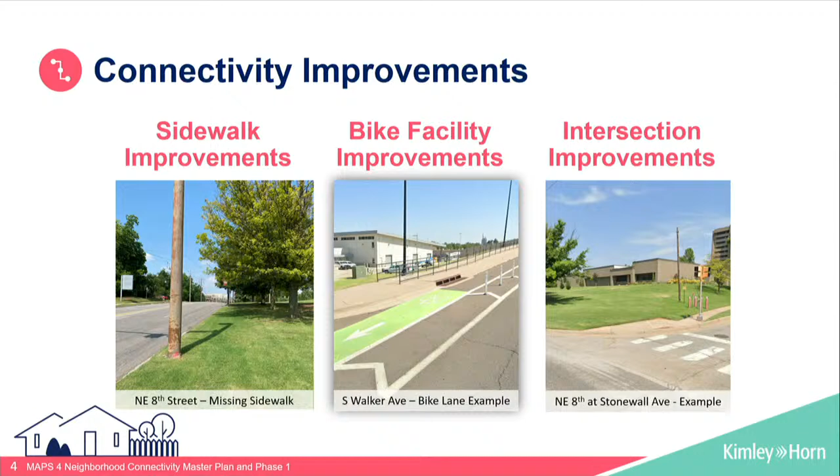And along Lottie. With this project, there's 3 types of improvements we're going to be focused on: sidewalk improvements and enhancements, bicycle facilities, and intersection improvements. I wanted to talk briefly about those so you can know what to expect. First and foremost, with the ADA sidewalk and design improvements, we're looking at opportunities to either close gaps and also fix the ADA compliant sidewalks along the corridors today.

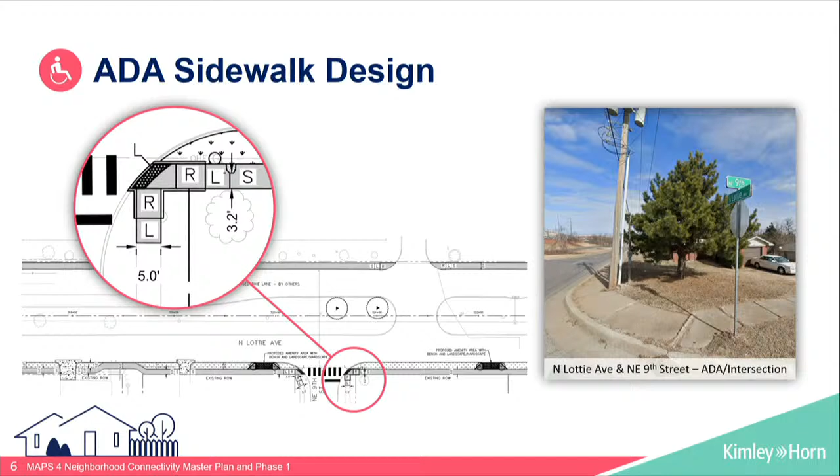You can see some pictures of the great sidewalks out there today that will be improved with this project. We're addressing 23 intersections with curb ramp improvements, as well as over 3.5 miles of sidewalks, so a lot of infrastructure will be constructed. Here's an example of what that looks like at an intersection along the Lottie corridor, where we're looking at curb ramp improvements to address all the constraints along the corridor.

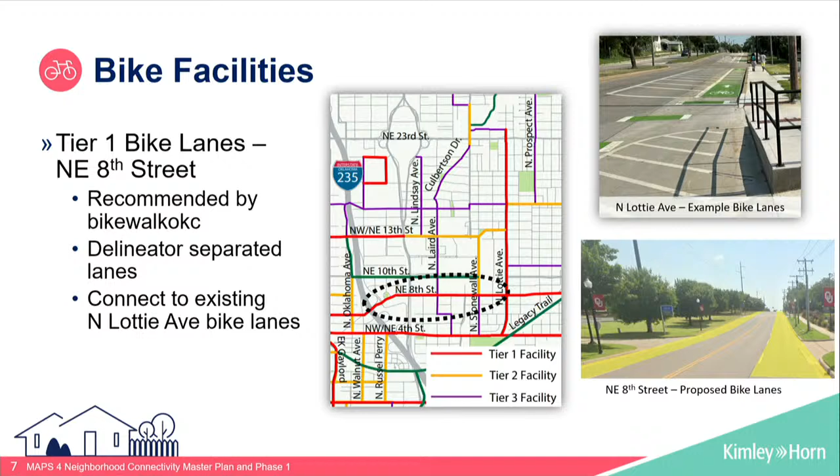The other piece of this project is intersection upgrades. Two things we're going to be doing are radar detection upgrades, so the traffic signals can detect bicycles along the corridor and better detect vehicles, as well as pedestrian signal upgrades, including push buttons and pedestrian countdown heads at the signalized intersections within the project corridor. All of this to be an ADA compliant project.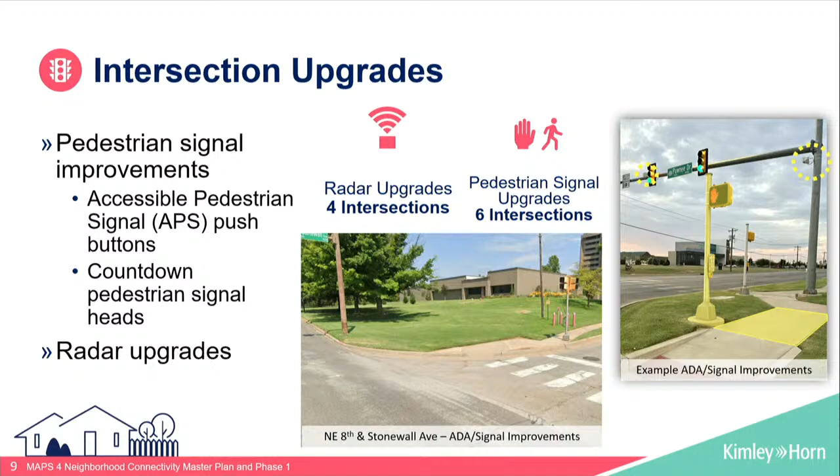Here's an example at Lincoln and Northeast 10th Street as part of this project. You can see the enhanced crosswalk markings, the curb ramp improvements, as well as the traffic signal and ADA improvements at the intersection itself to provide ADA compliant crossing across Lincoln.

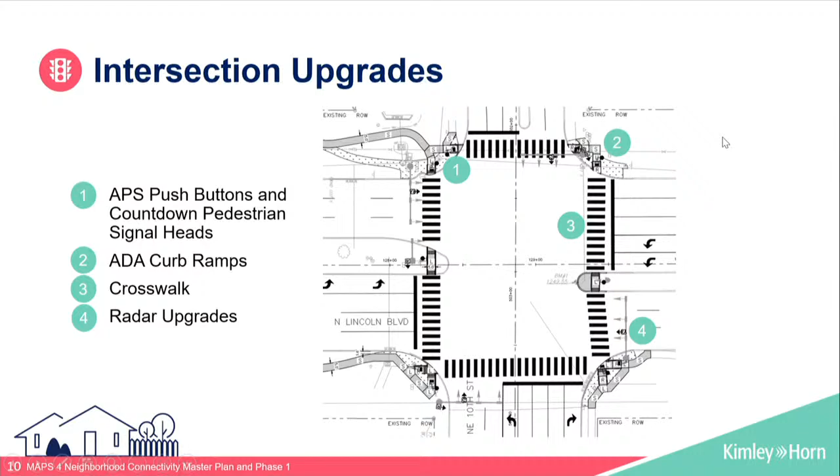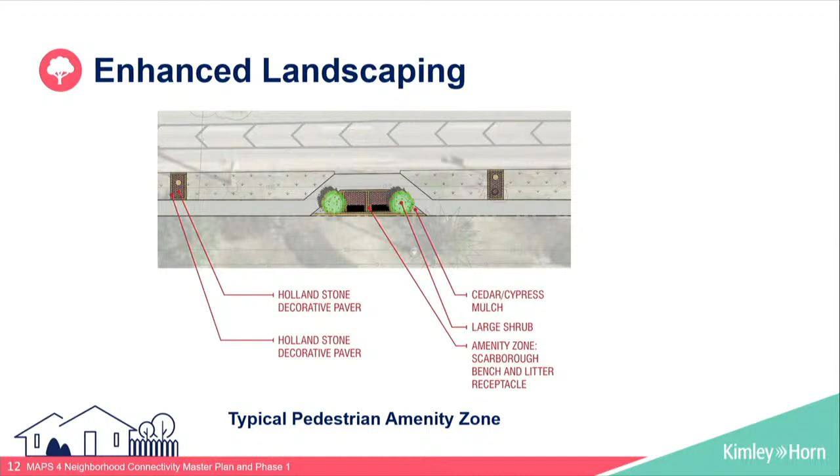Another exciting thing about this project is the enhancements from a landscaping standpoint. A couple things being added are street trees as well as amenity zones, and enhanced streetscape elements specifically in front of the convergence development. Almost 180 trees will be planted as part of this project, 35 benches, and 20 amenity zones. These amenity zones include benches, hardscape elements, and a place for shade to be able to stop along the sidewalk corridor.

Last but not least, with this project there's limited right-of-way along the majority of the corridors, so we have some acquisition that's already taken place to either provide temporary construction easements or permanent right-of-way to solve some of the corner clip issues along the corridors.

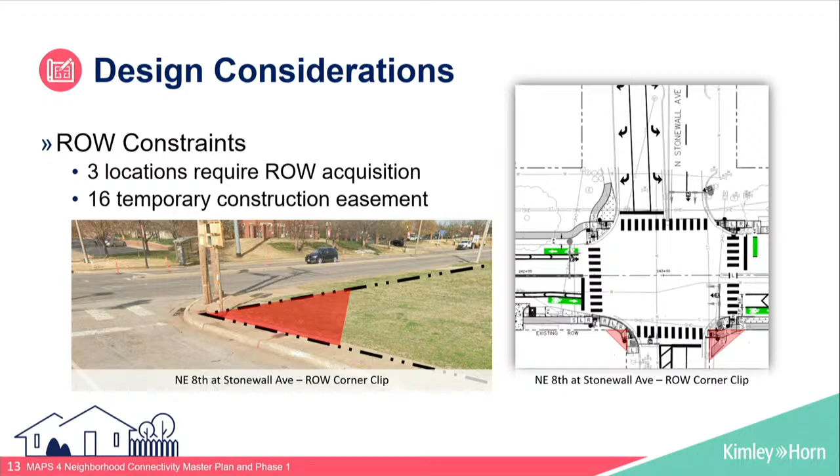Last but not least, the project budget was about $5.1 million that the master plan outlined. The current construction cost estimate is just under that at $5,040,000. With your approval and city council approval, this project will be advertised very soon. We're anticipating advertising the project in September, October, with a bid award not far after, and then beginning construction end of this year, wrapping up early next year.

Any questions for Luke? Okay, thank you so much. Excited to get this one moving forward too.

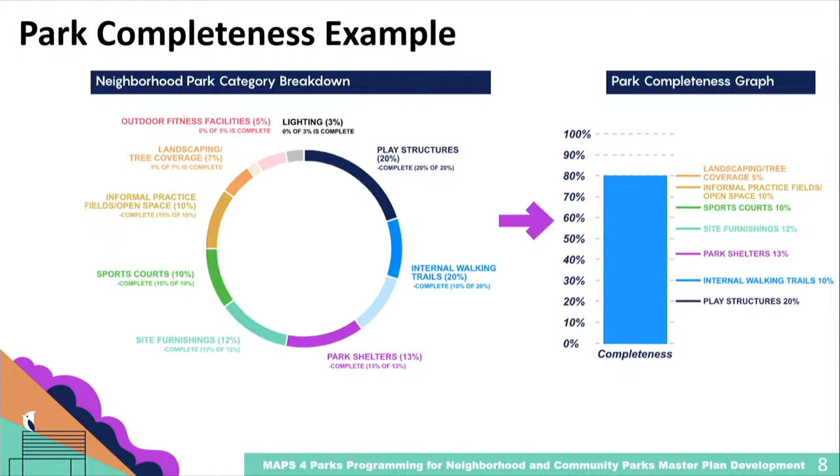Here's an example of a park when you evaluate completeness. This one had a playground, so it received the 20%. It had half of the walking trails that would be appropriate—it may have had walking trails to the playground but not a loop within the park, so that received half credit. When you add up all the elements, this one was 80% complete. We're only looking at the existing elements and whether they're there or not—we weren't looking at condition at this point. So this park was 80% complete.

On the other side of it, when we looked at park condition, we graded each element in the park on an A to F scale. We went out to all 105 parks and graded the playgrounds, the walking trails, everything on an A to F scale—a traditional school scoring system.

Here's an example of a park where you can see a C grade for the basketball courts in the middle—in average condition, functioning but not new. There was the swing set, which was in good condition with good surfacing and equipment, so that would be an A. And then the sidewalks were failing, so that's an F score. That's how we looked at things as we went through.

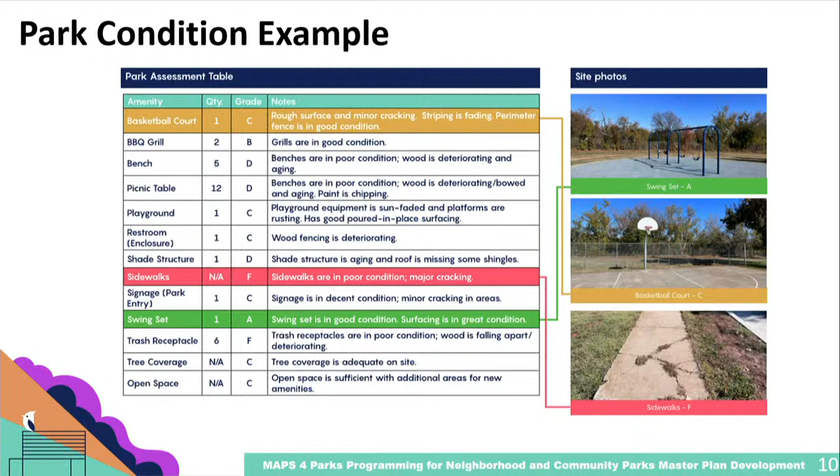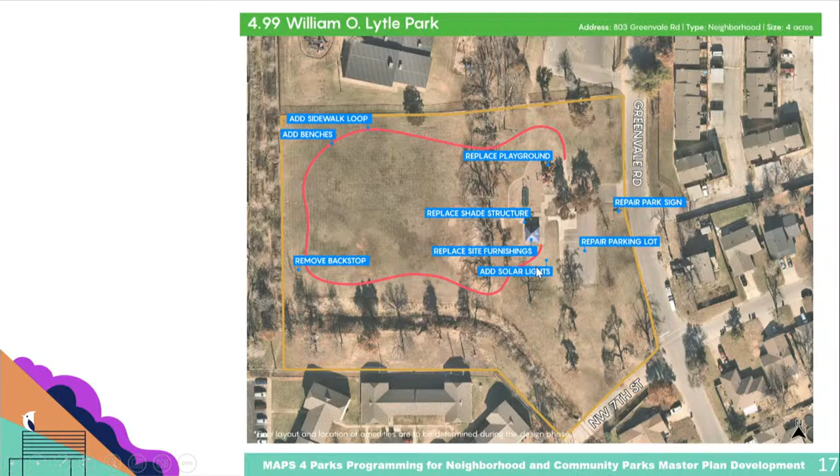So on this slide we'll quickly go through an example. Every park has 4 pages associated with it as far as the improvements are concerned. Here's William O. Lytle Park. It's a neighborhood park, and it shows all the recommendations in this report—a lot of it replacing things that were not in great condition, but we also added a sidewalk loop because it didn't have a complete sidewalk.

The element of community input is included on each of the park pages. This one had comments about adding security lighting, upgrading the swing set, that kind of thing. So when we looked at what needed to be improved, we also looked at the community input to see if that was matching what we were seeing.

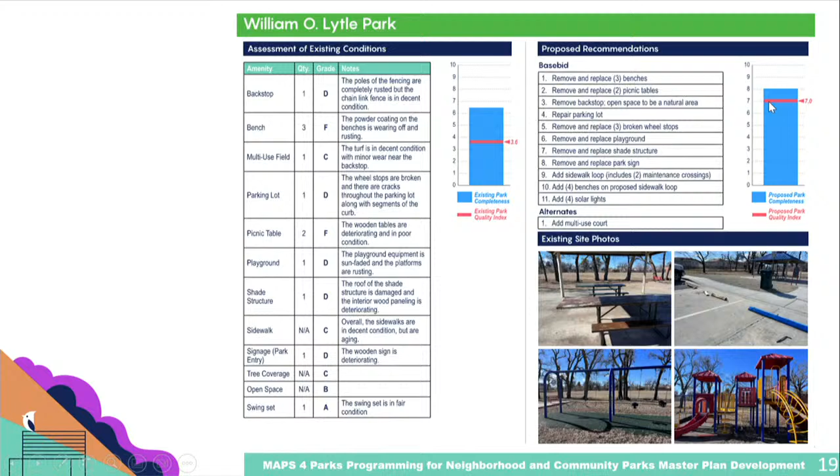Then this is the other portion where it shows the table of all the park scoring we had. It shows the existing condition chart, the existing score, and then the new score over there on the right with the recommendations. The last page for each of these is the estimates—here's the detailed estimate for this park. We also included alternates, in case the bids come in under budget, we'll have some things to add for additional amenities.

The other one is basically the same thing but looking at the community parks. Here on the community parks, there's not quite as wide a range of scoring. They're comparable, but there's still gaps. Looking at the bottom, we were able to even those up, and the target range on that was 5.5 to 6.5. It's a little bit lower, but there's more amenities in those parks.

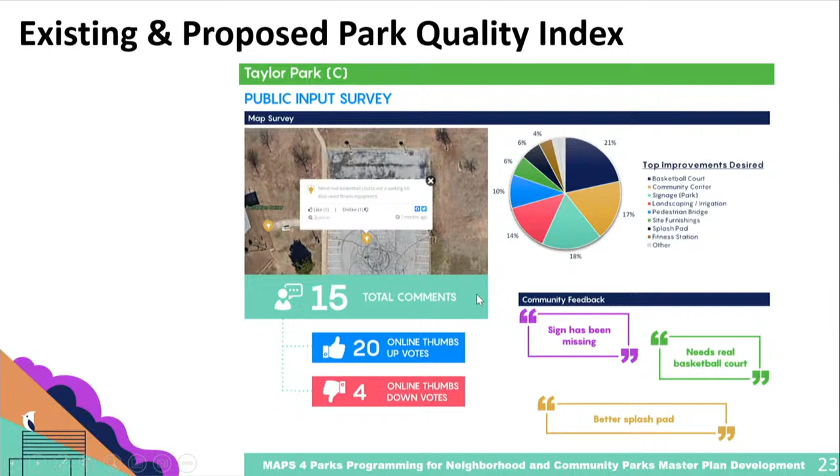So Taylor Park, this is an example of a community park. Again, same format with the recommended improvements. We had public comments on this as well. The same page shows moving the score from a 2.6, scoring really low, up to the 6.3.

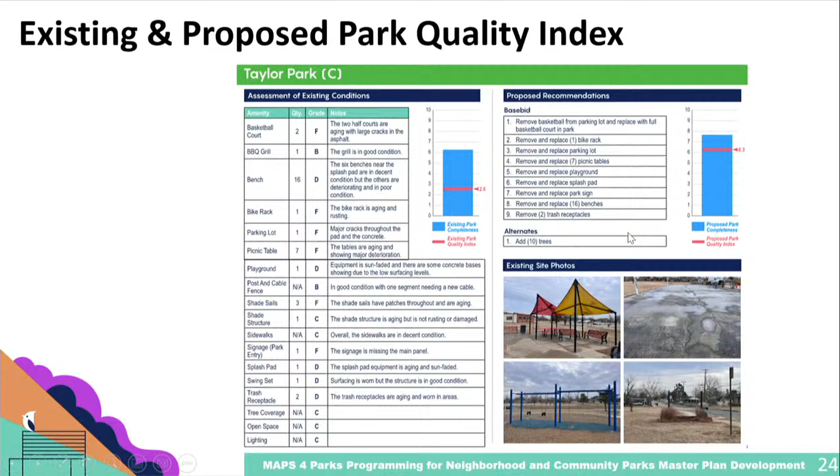The one thing I'll note on this estimate, there were some bond funds from 2017 bond projects that the Parks Department said to put into this budget too, to help it go a little further. Taylor Park was one of those parks that had the bond funding. So it shows 750,000 of improvements, but in reality it's about $1.5 million with the 750 from the bond money included. That really did help extend some of the improvements through this project.

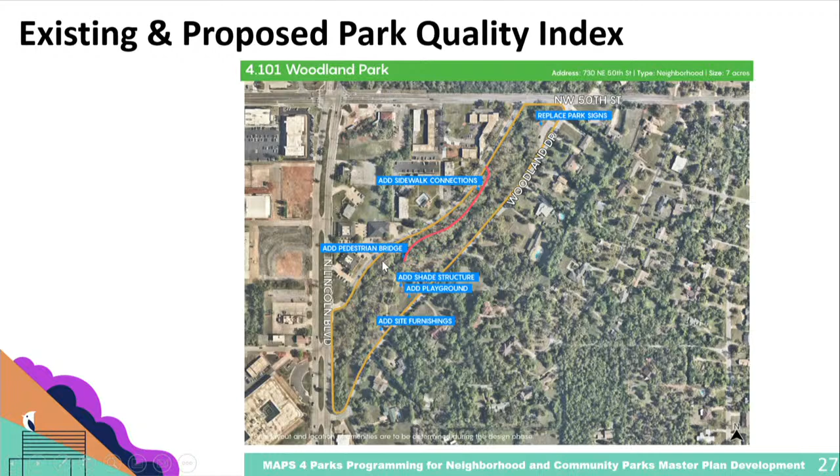One last one, this is a little bit different park: Woodland Park, a really wooded area. Wanted to highlight this as one of the inputs from the community was adding a connection across the creek there. Every park is a little bit different on the improvements, and we really did look at that community input as to what would be desired. So again, another estimate on this one as well.

The last step that we did after we made all the recommendations was to break these up into phases. There are 5 phases, basically each phase is about one phase a year, and then 2 bid packages in each of those phases. 1C is Washington Park, so that's its own phase, and then 2C is Draper, and that's its own package, not phase. Now we'll quickly look at the phases.

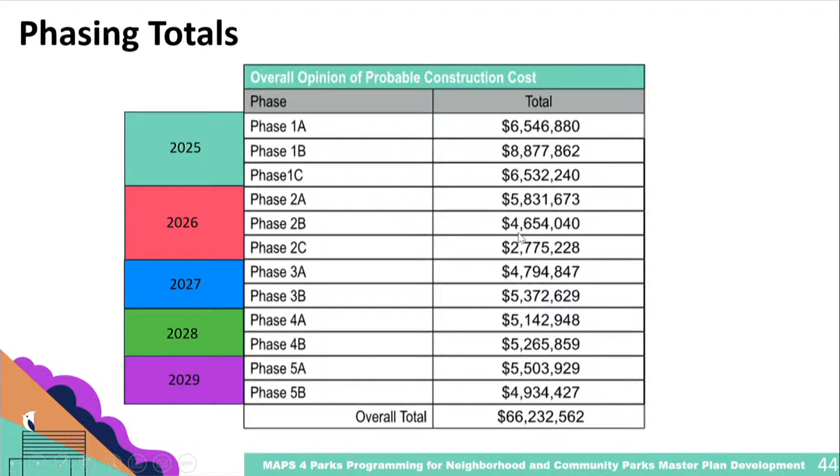Here's just a quick overview of how we're going to go from 2025 to 2029 on the spending to spend that $66 million. Another component that was a separate piece to this was the basketball and pickleball improvements. It had a little over $500,000, and those are proposed to go in Woodson and Earlywine. So basketball would be Woodson and pickleball in Earlywine.

And then the last slide here is just a few by the numbers. Out of 105 parks, there are 56 playground improvements, primarily new playgrounds. All the splash pads were replaced, so all 14 within this system, or the park, neighborhood, community parks. And then we have solar lighting, shelters, that kind of thing. So a really nice package of improvements across a lot of parks. With that, I will take any questions.

Questions? Daisy? Yes, I've had several community members call me, message me, and we met in person, requesting soccer kind of improvements, added soccer areas to the parks. I didn't see any of them in the southern parks. Did I miss something, or are those not included?

Mainly, typically neighborhood parks aren't large enough to really even have that much space for a soccer field. On the community parks, for the most part, there's no formal fields. Mainly those are used for practice fields. So there are soccer goals that we've recommended improvements on, but there's not the formal play fields. Those are typically found in your larger parks. We did add in a few parks futsal, which is the miniature soccer on a court.